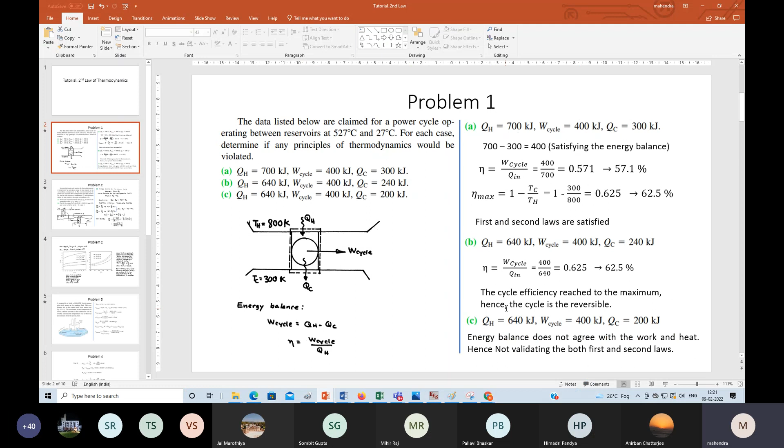Okay. Thank you. Give me 1 minute. Actually, I forgot to add animations. Only 1 minute. I'll quickly add animations and come back to you. Otherwise, no use of this tutorial, right?

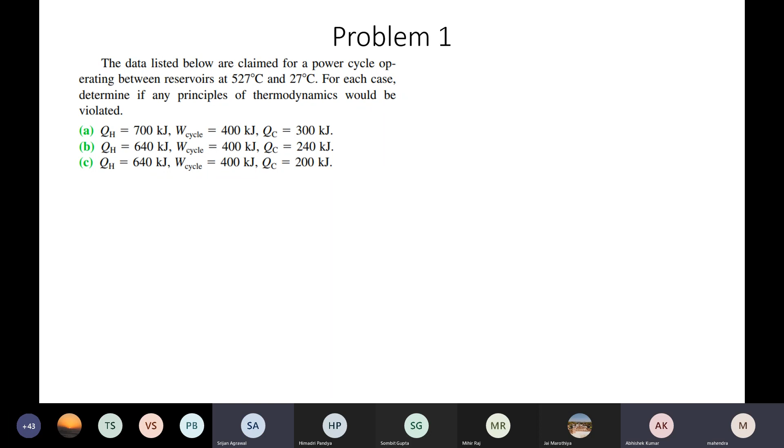So the efficiency is 5 by 8. So B is correct according to that, because the efficiency in the B part, work in the cycle upon the heat given, is coming 5 by 8. Okay. And sir, in the first part, the efficiency is coming out to be lesser than 5 by 8. Okay. So you could calculate the value also by calculator, right? Yes, sir. Okay. Correct, correct. Anyhow, let us see.

So I'm explaining over here. Here actually three different conditions have been given. What is your heat input? What is your heat output? Means what is the heat source from the hot reservoir, and what is the heat rejected to the cold reservoir. If you talk in terms of a thermal power plant, what is the heat supplied by burning the fuel? What is the heat rejected in the condenser? That is the cycle, right?

Heat supplied in the boiler by burning the fuel, heat rejected in the condenser section to condense saturated steam to saturated liquid. And because of the turbine, because expansion is taking place, you are getting a certain amount of work. That is what is listed over here for the power cycle. Three different conditions have been given, so whether it is possible or not, we have to check.

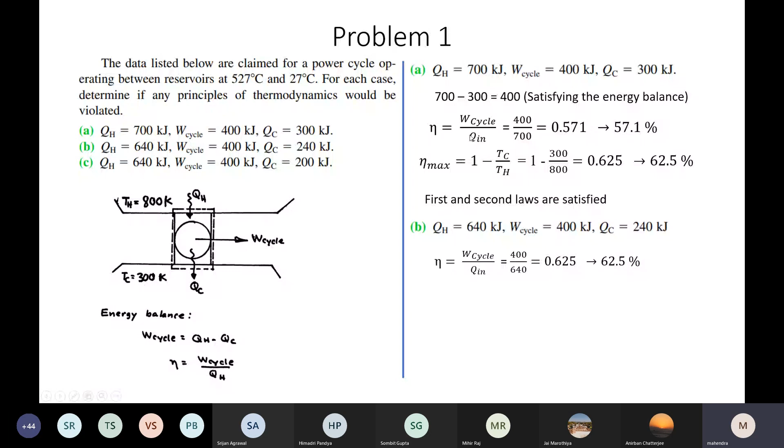In problem A, the cycle was an irreversible cycle, the actual cycle we can call it. Here in problem B, the cycle is a reversible cycle, a Carnot cycle. So maximum efficiency is obtained, but that is also acceptable. The cycle efficiency has reached the maximum, and the cycle is reversible. We cannot say it is not valid.

In problem C, if you see, the energy balance itself is not matching. QH minus QC should be 440, but it is giving you 400. The energy balance itself is not valid. Once the first law is not valid, there is no need to check the second law of thermodynamics. So for case C, it is not valid. This is the actual cycle, this is the reversible cycle. This is our problem number 1.

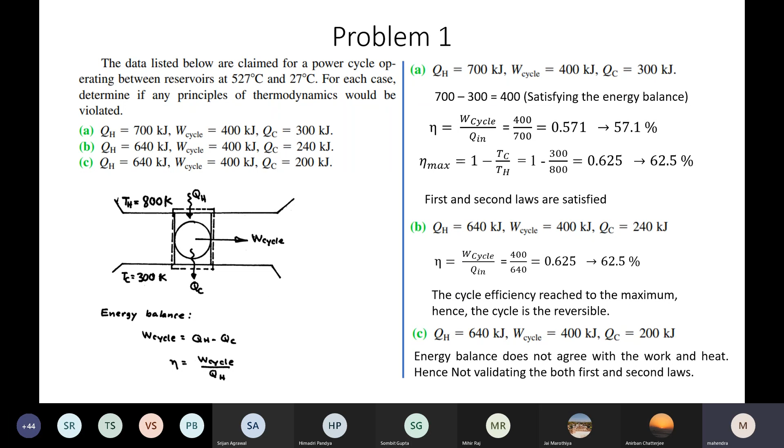Do you have any question or any doubt over here? Anyhow, after tomorrow's class, I am sharing this total presentation. Then you can go through it, or otherwise you can solve it yourself. Problem number 2. Please read very carefully. This was problem number 1. Problem number 2. Try to solve it yourself.

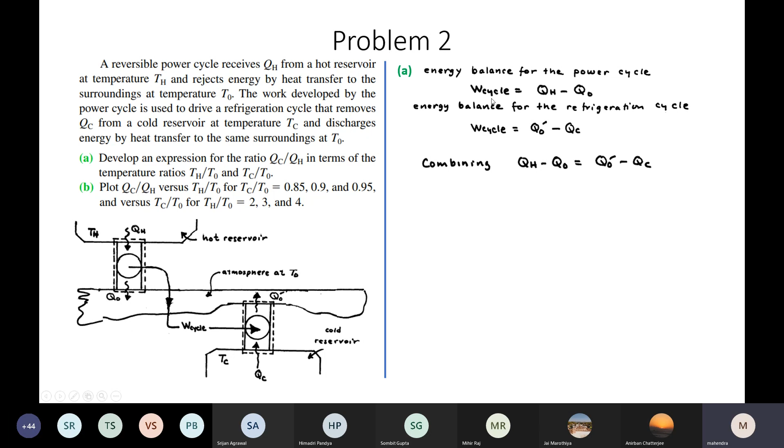For a power cycle, as you know, the power cycle is operating between these limits, and the refrigeration or heat pump cycle is operating between these limits. At the same time, the energy balance for the refrigeration cycle is between these two. This is the low temperature reservoir, this is the high temperature reservoir, and this is the work we are supplying here. When you are combining both, because this work only comes over here, these two works are the same. So when we combine, these two are equalized.

And then we are considering this as a reversible cycle. The power cycle is a reversible cycle, and the refrigeration cycle is also a reversible cycle. So we are forming these equations. Finally, this is Q naught by QH. Since it is a reversible cycle, we equate it with the Carnot cycle, so Q naught by QH equals T0 by TH. What is the Carnot cycle efficiency? Eta equals 1 minus QC by QH, and also eta equals 1 minus TC by TH. So in terms of heat energy and in terms of temperatures, both are equal.

That way we got this parameter for the heat engine and this parameter for the refrigeration cycle, each just reformed like this. Combined, when we substitute, your equation is formed like this. In terms of Q naught, you substitute this; in terms of Q O dash, you substitute this. Whatever common factors are there, you take outside. Then we get QC by QH, that is, from this reservoir to this reservoir. So we have developed this equation in terms of temperatures only, because temperature ratios have been given.

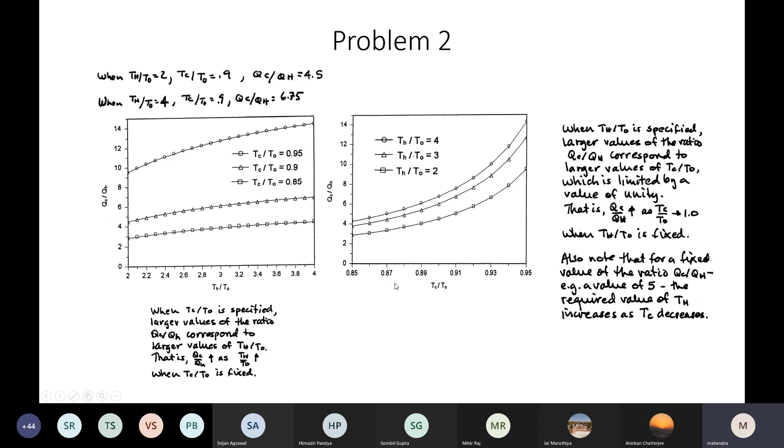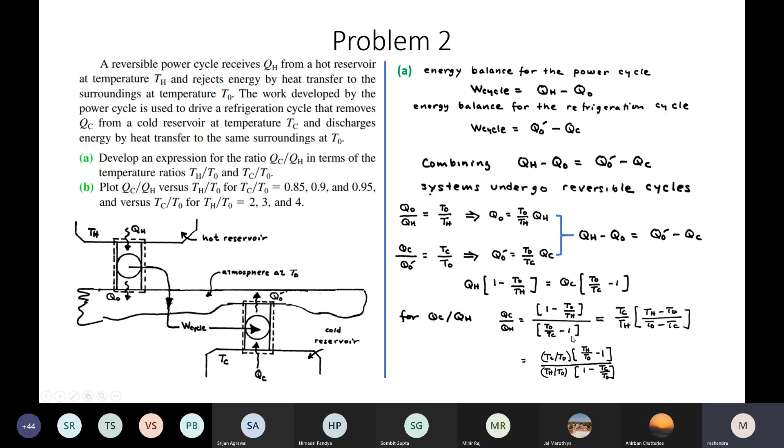TH by T naught here, QC by QH here, with different TC by T naught values plotted. Similarly, the reverse: on the x-axis, instead of TH by T naught, you take TC by T naught, and TH by T naught becomes the variable parameter, and then you get these plots. This is only understanding how this works and deriving a new parameter, nothing more. You can understand it very well by reading this.

You need not go to table number 2 or table number 3 in most books. There you will find, for pressure of 10 kilopascal, what is the temperature. That is a laborious process. So if you open your EES window, this is the pressure, we are considering it is saturated steam, then you get your temperature as 45.81. This we got either from the table or your EES.

Now you know higher temperature as well as low temperature. Then we are applying the reversible Carnot cycle. The efficiency is 1 minus TL by TH. Your efficiency is this much. Then in the similar way you will be able to find out your Q minimum. So we have calculated here Q minimum. Then mass flow rate, this is given over here.

This is the volume. And then we are taking these particular things according to their dimensions. The flow rate is this. This is the speed. That way, the mass flow rate is 80,000 kgs per second, from these given dimensions and given flow rate and speed. So these dimensions are simply to calculate mass flow rate of the water,

otherwise nothing. This heat, whatever you have calculated, is the rejected heat in the condenser. That rejected heat is obviously heating this much of the water. So that we have equalized over here. This heat equal to M delta H. Delta H would be what?

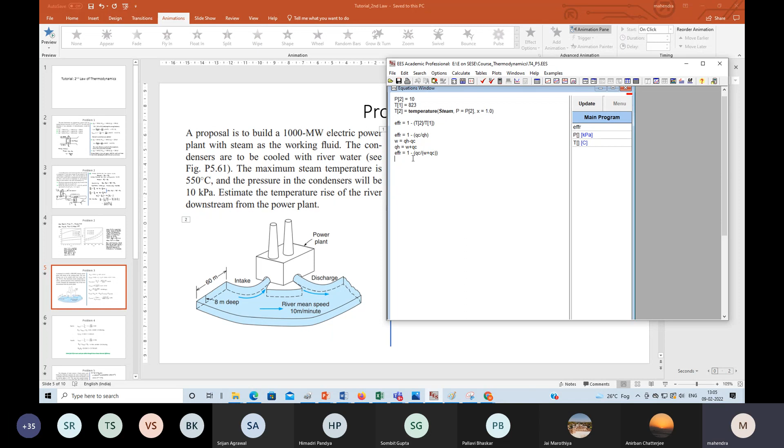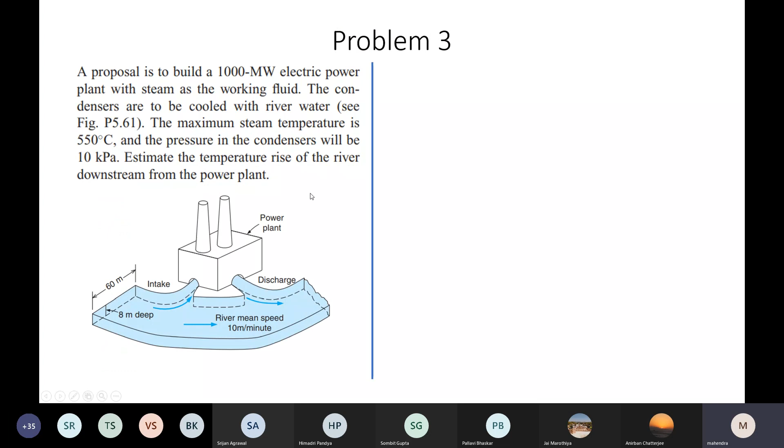Okay sir, I can do that. It is only calculations. You will take this as the common factor, the LCM, W plus QC. If you do these things, you will get it. Nothing more. So this is how you can solve it. This is about problem number 3, and problem number 4 is also a very small problem.